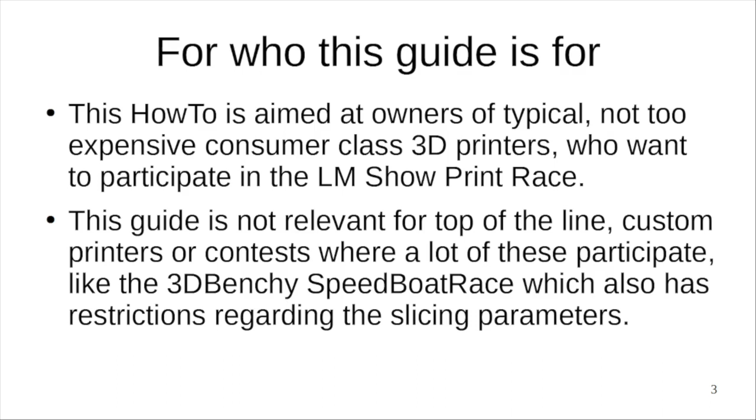Okay, who is this guide for? This guide is for everyone who wants to join the LM Show print race, which usually happens on Fridays, and you can use any printer you want. This is, however, not suited so much for people who have a really high-end custom printer like a Voron or VzBot or something like that, or for other speedboat race like print races which have other limitations.

How do you win the print race? Well, it's not about speed so much, it's mostly about cooling, flow, and the slicing, in my opinion, because you can set the layer heights as you want in this case. You can probably win with bed slingers as well, as long as no really high-end machines show up. And the reason for that is that you're printing close to the flow rate limit most of the time. I will show that in the slides later. Slicing is also very important because you can shave off so much material there that you're going to have an advantage from that. This is also a point we're going to look at.

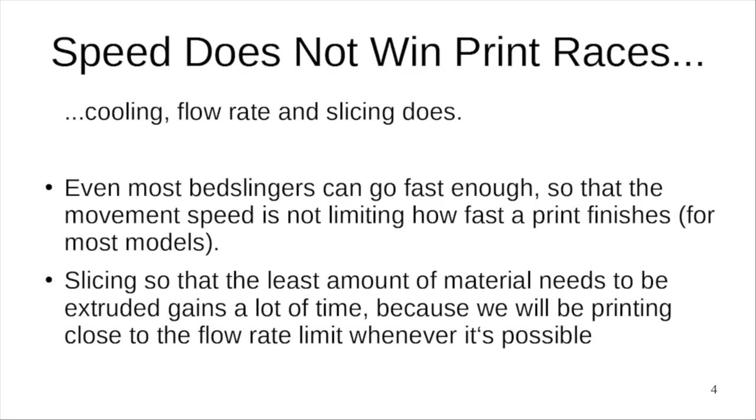Okay, let's start with the most important hardware upgrade for your printer if you want to participate in a print race and you don't already have proper cooling on it. This is a really low-hanging fruit. You can improve the layer times, which gains a lot of time when printing fast, and also you get a much nicer print quality on overhangs even if you don't print fast.

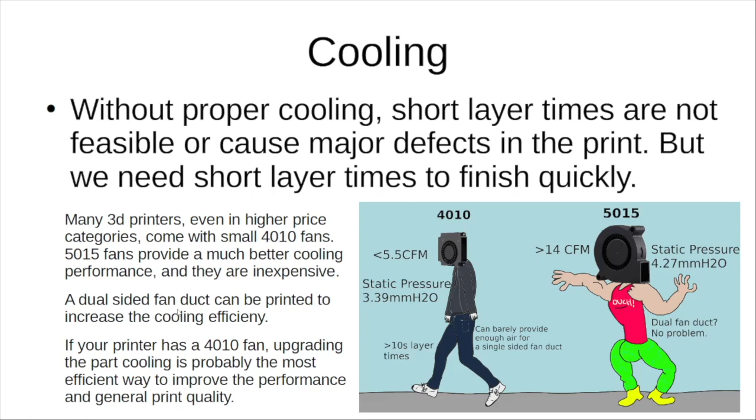So if you do a single upgrade, then it would be to replace the 4010 fans which come on many 3D printers, even not so cheap ones, and put 5015 fans on it and print a proper dual-sided fan duct, and then you should be fine as far as the cooling side of the equation.

And another really important part, of course, is the flow rate, because usually if you have a properly set up printer and slicer profile, then at the print races you will go close to the maximum flow rate of your hotend and not to the maximum movement speed of your printer. So increasing the flow rate instantly means to print faster.

The flow rate is how much material you can extrude in a given time, and to extrude it, of course, you have to melt it first, and there are several things you could do to extrude more. You can bump up the hotend temperature. This has drawbacks, however. You have to consider that you have to cool down the hotter filament again. You could increase the extruder pressure, but then you get die swell because the filament isn't completely molten inside, and it's also not a nice effect.

These are also inexpensive if you buy the clones from AliExpress or so. And it splits up the filament, has more contact surface, and melts the filament better, and you get more flow out of it, and you don't even have to install a new hot end. Just buy the proper nozzle for your hot end, screw it in, and there is your higher flow.

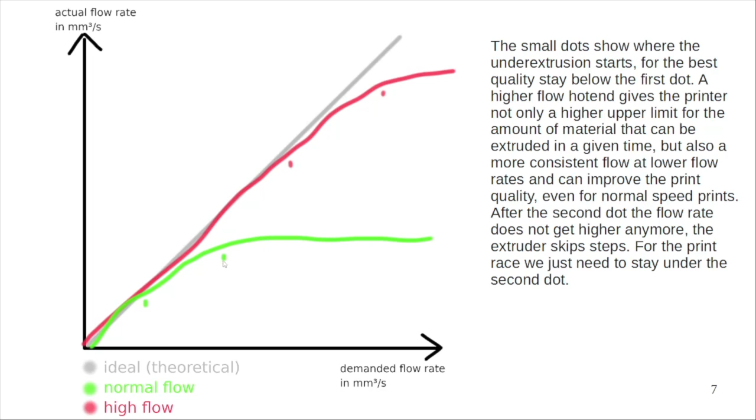But if you really want perfect prints, you do not want to operate in this area where you're under the gray line with your actual extrusion. This is where higher flow hot ends have advantages even for not so high speeds, because they are just more linear in this range here, even if you don't print so fast. So it's not just an upgrade for the print race, it's a general upgrade for print quality, in my opinion. And yeah, maybe get one of these and see how.

If you want even more flow than with the upgrade of the nozzle itself, then you can also increase the size of the nozzle, like a Volcano nozzle. These are also available as CHT nozzles, so you get both. You get the longer melt zone and the splitting of the filament. And if you want even more flow, then you probably have to reprint the tool head and install something like a high flow or an ultra high flow hot end.

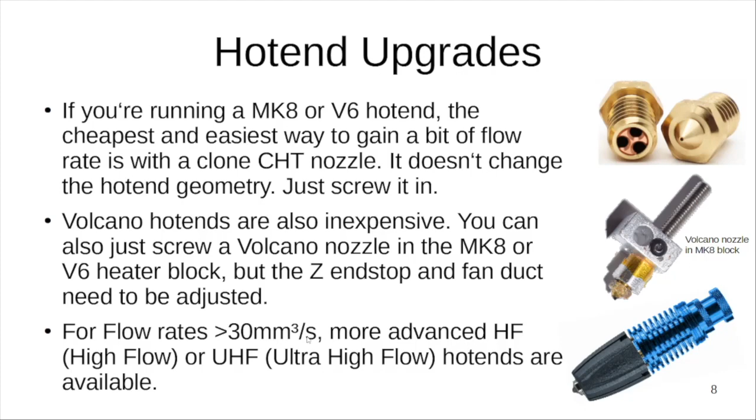Of course, the order in the complexity to do the upgrade is this. The nozzle just screws in. Here you have to adjust the end stop and the fan duct, and here you have to reprint the whole tool head. And also the price, I mean, if you look at this, then yeah, these are really cheap. The Amazon ones are a bit more expensive than if you buy them directly from AliExpress, but still affordable.

And you can go all the way here to LM's new sponsor and get this beautiful hot end here for a bit higher price, and then you will practically be guaranteed to win every print race, because no one can match your 116 cubic millimeters per second flow rate. Just for comparison, the MK8 hot ends maybe have around 12 to 15 cubic millimeters per second.

Okay, so you want to buy a new nozzle or a new hot end, then the important thing to consider is which nozzle diameter do you get it with? Well, many people say 0.8 millimeter or so is better for print races. You can print so much faster with it. Yeah, you can print higher walls with this, but you also have to print wider walls with it. So the perimeters that you print will take so much flow that you can't go fast enough.

And you don't want to print inside of the print. You don't want the wall strength necessarily. Just for the print races; of course, for a helmet also, it's great to have this. But for the print races, you don't necessarily want it, because it takes away the budget of flow and the budget of cooling that you have, and uses it to print inside and not to print to the top. And if you reach the top, you have finished the print and you maybe win. And if you print to the inside, you just make a more solid part.

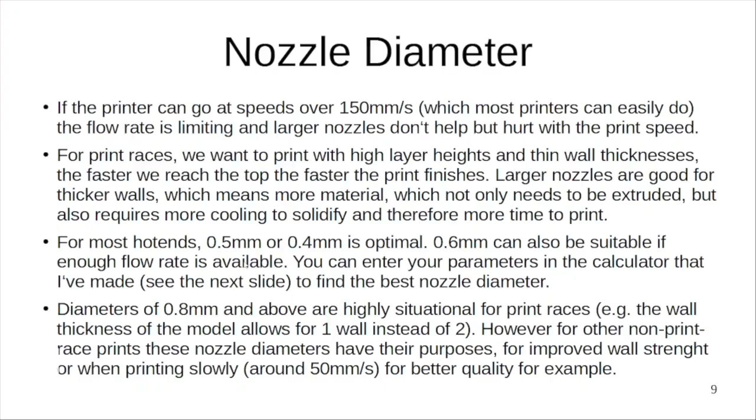So for fast print speeds, say 150 or 200 millimeters per second on average, you can't really extrude so much material that you can afford a 0.6 or even a 0.5 millimeter nozzle if you really go fast. This is something you can calculate, and I have made a small tool for you here. It's also in the presentation, but you can try it here. It's the actual link here. You enter your speed, the layer height, the line width, and the maximum flow rate of your hot end, and it will give you the optimal nozzle diameter and at which speed this will print.

So of course you could say I'm going with a bigger nozzle, but you quickly get in the range where the flow just isn't enough anymore, because this line width here is the problem. You can decrease it maybe to 80% or something of the nozzle diameter, but still you will not get these really big nozzles that are the fastest with your hot end. Even 20 or 25 cubic millimeters per second will give you not more than a 0.5 millimeter nozzle. You have to go really, really high with the flow rate to get in the ranges where you can justify a 1 millimeter or 0.8 millimeter nozzle.

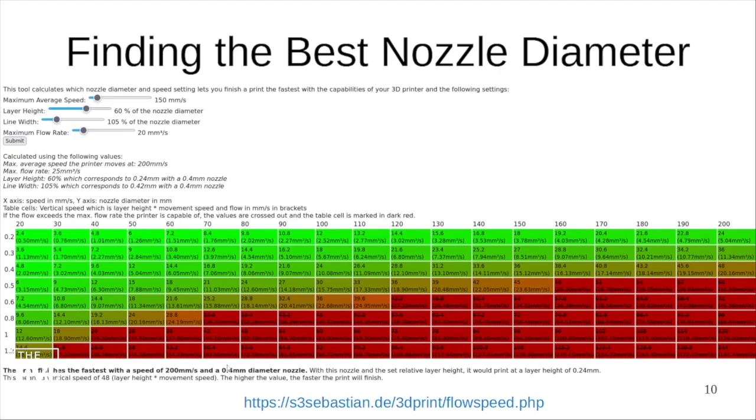But as you will see, this is about the flow rate that comes with the $1,000 hot end. So this is not something you have on your ordinary printer, even if you upgrade to a better hot end. So keep that in mind and calculate what you could use for your printer. Make sure to use the average speed here. This is not the maximum speed. You also have to consider the small parts. But even with that, you will probably not get recommended something more than a 0.5 millimeter on most printers.

Okay, we talked a lot about flow, we talked a lot about cooling, but many people probably think about the actual movement speed when it comes to print fast. Yeah, that's true. The movement speed is also very important, of course, but this is usually not where the printers are limited. Even the bed slingers are not limited in speed, they're limited in acceleration, because the print bed is heavy to move, and heavy to move means you have a big M in this equation, and so you require a lot of force to move it back and forth.

And it's the same as with a car. For example, every car can go 100 kilometers per hour. It's just the question if it accelerates in 3 seconds or in 10 up to this speed. And to print faster, you have to increase the acceleration.

Another limiting factor here is the ringing that you get, and this is actually something you can counter with input shaping, or also called resonance compensation, that comes with Klipper or even your Marlin versions. The Klipper implementation is much better, but you can also use the new Marlin version of it. This will reduce the resonances introduced by the belts, which stretch and give you this ringing on the print, which is not very nice and also can ruin your print.

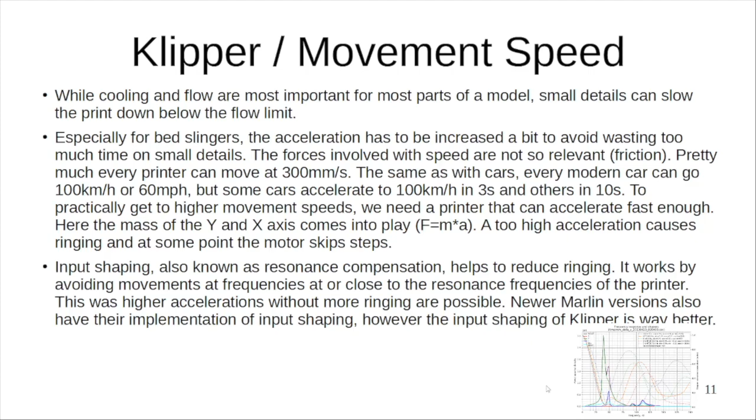So if you want to go fast, even with a bed slinger, you have to consider Klipper or another type of input shaper, and this can be achieved by multiple ways. For example, you can use an old laptop or something that you already have. Any PC is fine, and combine it with a USB type accelerometer. You can get a Raspberry Pi, Banana Pi, or Orange Pi and combine it with a breakout board accelerometer like this, which is a bit cheaper than the one with USB. Or you can get the all-inclusive solution like the Creality Sonic Pad here, which also comes with the accelerometer already.

It doesn't really matter. These are all fast enough to handle your print speeds. These are not limiting you in computing performance. So just get what you are comfortable with, and then you can, even with a bed slinger, print up to 5,000 millimeters per second squared, which is better than what you can print out of the box with it, and probably enough to compete with faster printers that have a better motion system. Of course, you can't really compete with a top-of-the-line printer, but it's already a big improvement if you go for Klipper and input shaping.

Calibration. This is another step that I entered here. Before you start to tune your printer on the hardware side, make sure it prints well at normal speed. So don't try to improve before you have your printer dialed in at normal speeds. Just something that I also wanted to mention.

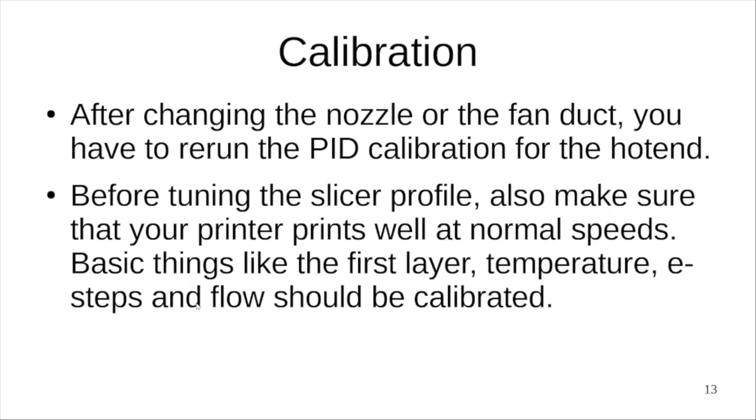The material is also important. You can't really use silk PLA or matte PLA or TPU because these just can't be printed so quickly. The silk and matte PLA just don't have the layer adhesion, and they don't stick so well if you print them fast. So you will not have a print that works well. There's an exception for PolyTerra, which is matte, but also prints kind of fast. Most standard PLAs are fine.

There are some really fast printing PLAs. You can get some small gains from them, like the Sunlu Meta PLA is not so expensive. You can try it. It's a small improvement, but it doesn't really replace a high flow hotend, so don't think you can just get away with high flow materials here. ABS is actually also fine, but you have to make sure that you really can print this without having a print that warps away and fails. This will also not be that great. So only use ABS if you have the proper print bed, but the really high-speed prints are always done with ABS and not with PLA.

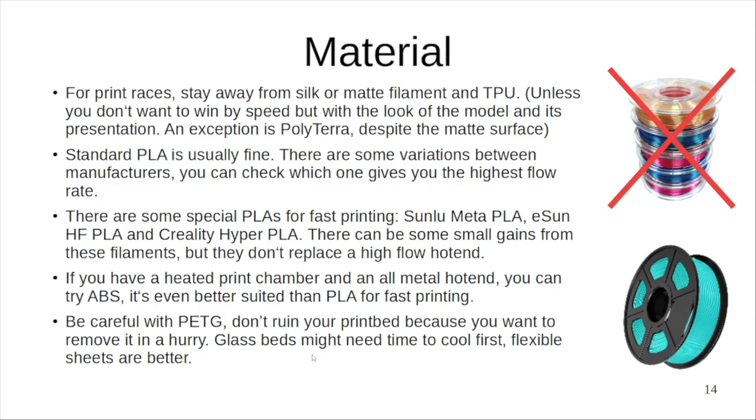If you look at the Benchy speedboat race and so on. PETG would also work, but you have to be careful if you have to remove it quickly. Maybe your bed needs to cool down first, and PETG easily damages some kinds of bed. So don't rush your PETG removal. Maybe stick with PLA then.

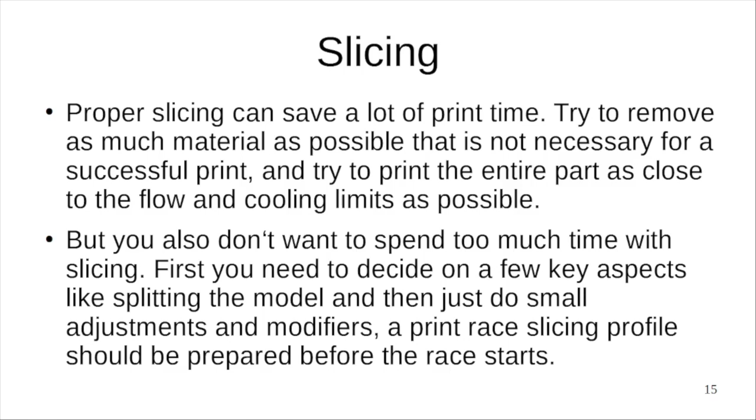Slicing. This is the most important part probably, because you can save the most time by just reducing the amount of material that you actually print. So get familiar with your slicer and prepare a good slicing profile, and then when the print race starts, you have to pull all the parts into the slicer and make the decisions, which are first, how do you want to split the model?

So look at the part really well, and then decide, do you want to split it? If the model has several parts and you have several printers, always split it. If you have only one printer, it's not an option, but if you have multiple printers, you can also consider splitting a single part into multiple parts if you can gain time there, for example, by avoiding support structures, or if it's just really big and you can print faster this way. Then after doing that, we are going to continue with the biggest part on the fastest printer.

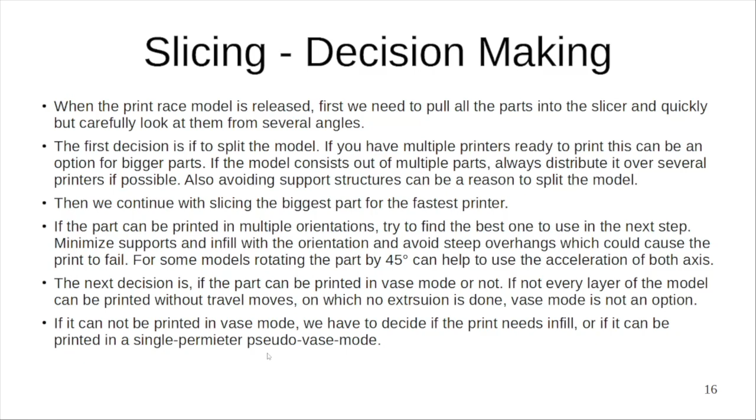Then decide on an orientation. The best orientation is one where you avoid overhangs and supports as much as you can, and generally look for printability and also speed by orienting it in a good way. The next decision after doing that is if we can actually print in vase mode or not. If vase mode is not an option, it's not an option for every print, then we are going to decide if it's a good way to print it in pseudo vase mode, how I call it. It's just turning vase mode off again, and having one perimeter, having zero infill. If it's printable like that, great. If not, we have to consider the amount of infill and perimeters.

The prepared slicer profile also has to have a few key functions. The layer height is the most important parameter, because the faster you want to go upwards, the higher the layer height should be. But a higher layer height also means you can't print overhangs so well. So you have to tune it down later with variable layer height again, maybe.

And then, of course, the speed and the acceleration are also something to set. I can't tell you the real parameters here, because you have to configure it to what you find out is suitable for your printer. Maybe for a Bedslinger, 5K accelerations and 250 millimeters per second with Klipper or something like that on a not too big Bedslinger. And for Bowden extruders, reduce the retracts as much as you can. If you can't reduce the retracts, just avoid them and burn away the strings with a lighter after the print finished.

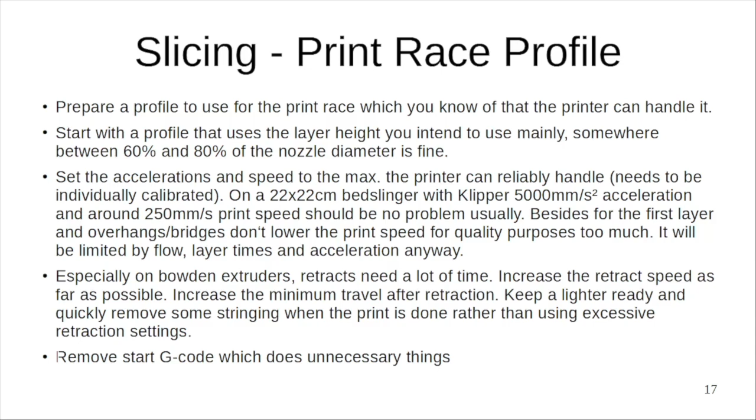The filament parameters are mainly the cooling time or the layer time and the temperature. I would recommend to go about 215 degrees with PLA. The higher you set it there, the faster you can extrude, of course, but you also have to cool it down. And cooling down is the next big thing. It's the layer time for small parts. A lot of time can be lost here.

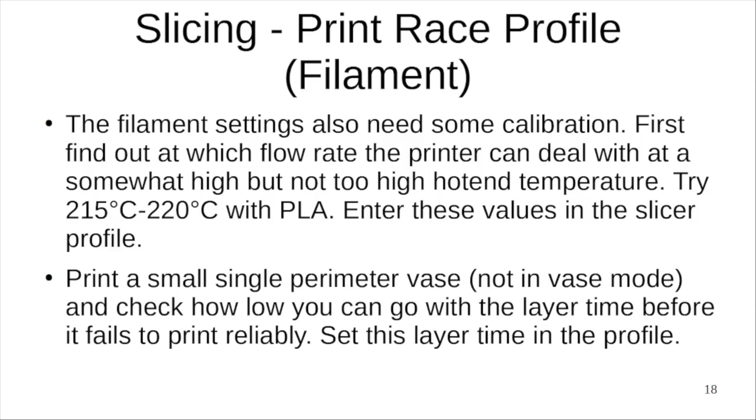You have to consider that this is also a parameter where I can't tell you what is the best to use, because you have to look at the part again and maybe adjust it, or use a time for the layer cooling that you know works well with your printer fan duct and so on. So set this before the print starts to a value that you know is working. Aim for about a second or so, and not about 10 or 20 seconds. This will not work.

The print settings for the general profile are also the perimeters, which you should set to 1. If you need more, increase it later. And the extrusion width should be set to something below 110%, because it just wastes material there. Besides the top and the bottom layer, because you have to print the width there anyway, so you can also print a wide line. So for everything that is not on the bottom or on the top, don't print too wide. And top layers should be really avoided, and I'm going to show you this here.

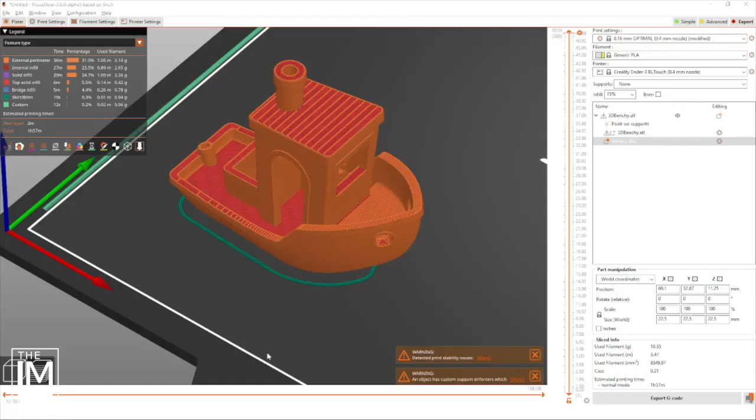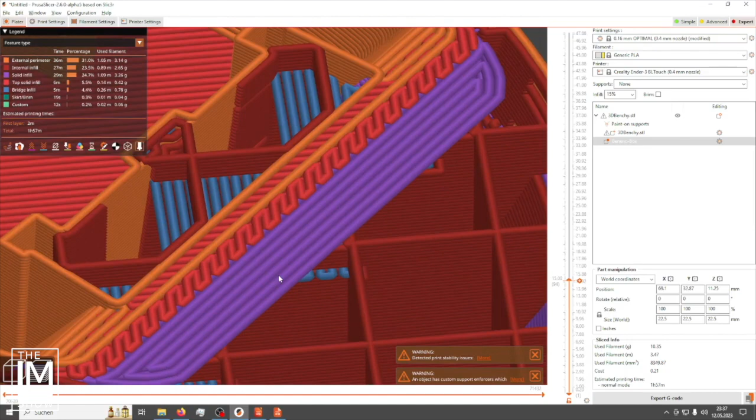Because top layers on flat surfaces are important, and you need probably more modifiers to adjust the number of top layers here. But these overhang top layers with the zigzag here and these extra perimeters that are generated, these are the worst, and they steal so much of your print time that you have to avoid these, and that is why you need to turn down the top layers. And if you need more top layers for a flat surface, add them with a modifier later. I'm going to talk about that next.

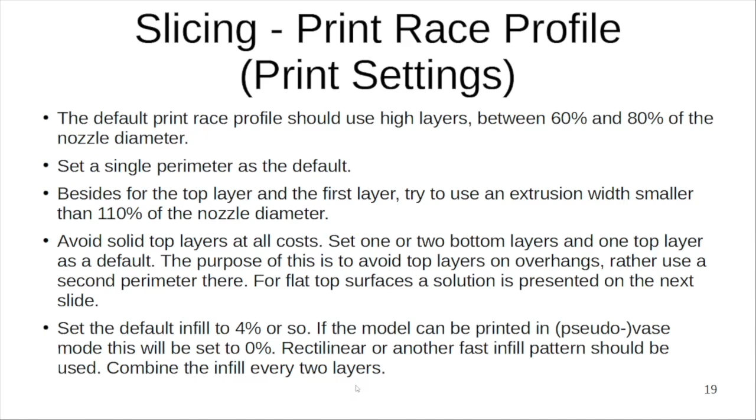And the infill should be at its lowest possible. If you need more infill in a part, then also add a modifier. Yeah, modifiers, I just talked about it.

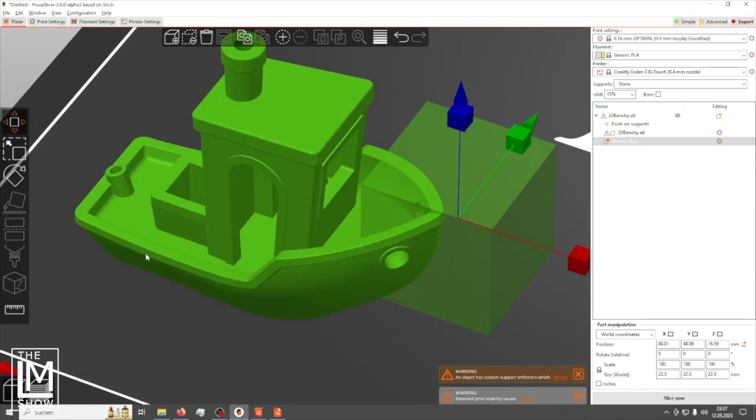These modifier boxes that you can add, you should really use them to increase the strength of the part where you need it, and you can print the rest of the part faster. And another thing, of course, is the variable layer height. You can improve the overhangs here, because not everything can be printed with high overhangs and high layer heights.

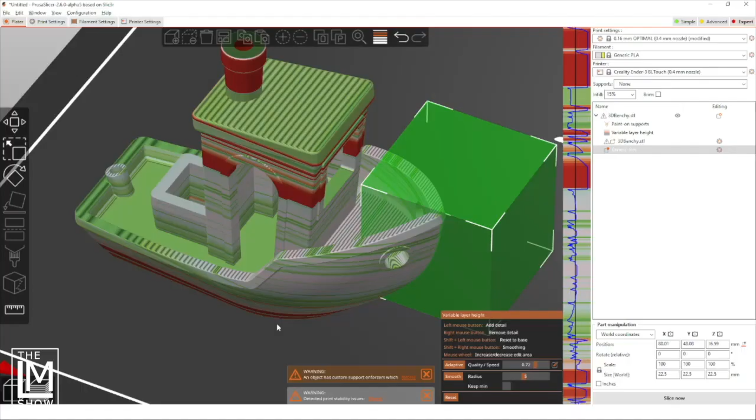Yeah, and the support structures are also important. If you would need support structures somewhere, of course you don't need it for the Benchy, then you should go and use the paint-on supports here, and don't just enable supports for everything. It will generate giant support structures, which just take so much time to print, and it's something you don't want to do.

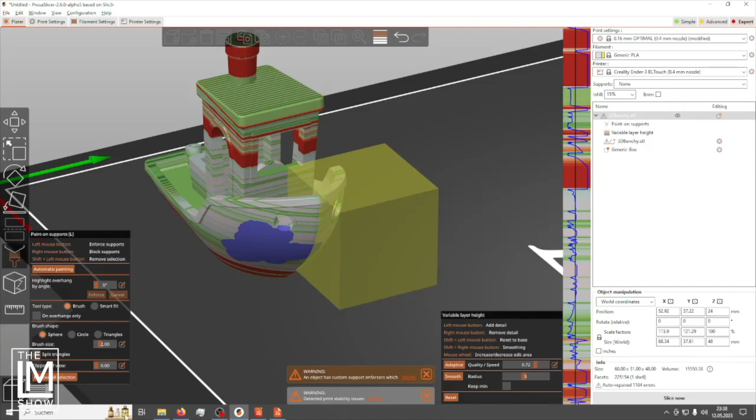And now you have finished the slicing maybe, and you want to print, but stop. First we are going to look at the actual preview of the layers, because if the print fails, then there's not enough time to start again. So look at these layers here one by one, and if you see something that will not print, then go back, add a modifier, add a setting somewhere to make sure it will print on the first try.

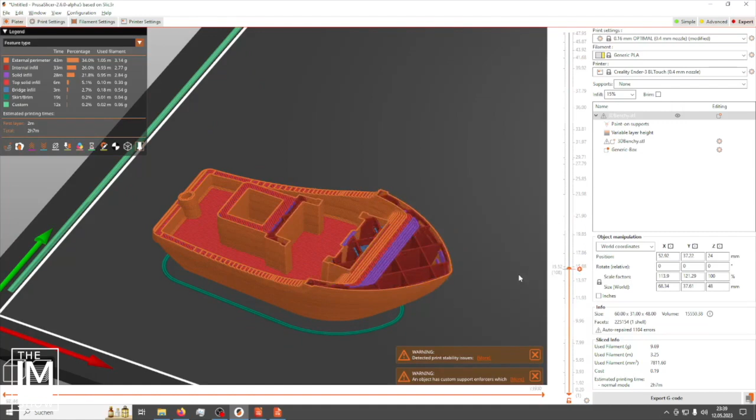And also make sure you have selected the right slicer profiles, and if you export it, then wait for the export to completely finish. Don't pull out the SD card before it's finished, and use the safe eject function for the media on your operating system, so that you make sure it's completely written.

Okay, now we are done with the slicing, and I also want to talk about the preparation quickly. Preparation means that you prepare not just a slicer profile, you also have your printer ready, in a state where you don't have to level the bed or something when the print race actually starts. I often see comments in the chat, oh, my printer is not ready, I can't participate today. So maybe think about it a few hours before, and then this will not be a problem for you.

And of course, the slicer can also be opened before the print race starts, you can load the filament before the print race starts, and you can preheat the print bed before the print race starts, but don't preheat the hot end to the full printing temperature and let the heat creep up. That's not a good thing. It could clog your hot end, and isn't worth the time saved here.

And then when it goes to the end of your print, make sure you have a camera ready. Don't search for your phone after the print finished to take a photo of it. And also think about where you're going to place the model, because as you know, build plate photos are not allowed. So make a nice place to put the model in, and have your camera ready. This is also something to save you a few seconds.

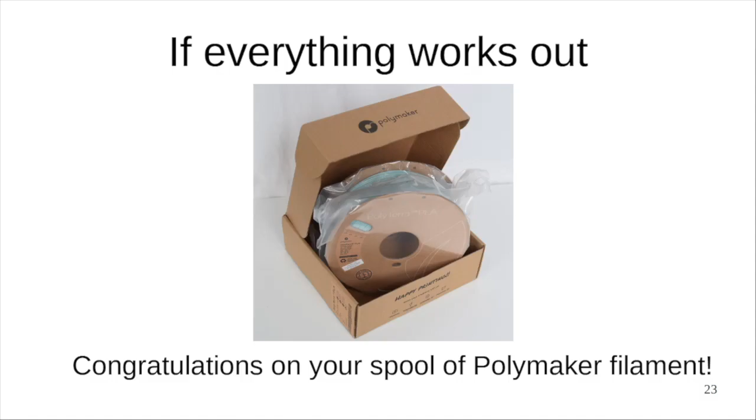And in the next step, I'm going to show you the actual slicer settings and how to slice a few models. That had a lot of awesome information in it, didn't it? Okay, the next segment that Sebastian goes into is how to create a slicing profile. And then after that, he'll go through a sample slice. Let's continue. Okay, let's take a look at the slicer.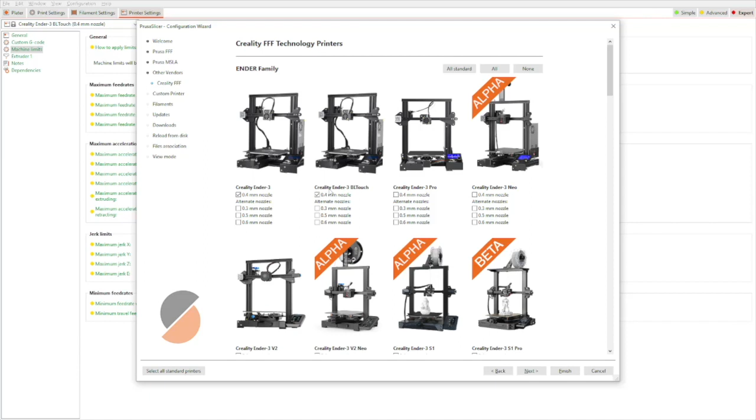I'm going to use a standard pre-configured Ender 3 profile for the standard Ender 3, in this case with the BLTouch. I'm going to use PrusaSlicer just because I'm more familiar with SuperSlicer and it, but you could also use any other slicer that you want, and the names of the settings are usually quite similar. So let's start with this one. I'm starting with the vanilla pre-configured profile. The feed rates are high enough, I would say.

Maybe we can increase the extruder feed rate a bit, but here we have to really do the modification. We need much more acceleration. We do this in the X and Y direction, not in the Z direction, and the extruder acceleration maybe a bit higher. But these are important as well. While retracting and while extruding, we also want to move fast. Looking at the jerk limits would now be a bit complicated. If you're running Klipper, this is the square corner velocity, and you set that in Klipper anyway.

Okay, this is just the maximum the slicer would allow. We have to set the actual speeds in the print settings later. And here for the extruder, also some important settings. If we are using variable layer height, this will be the smallest and the biggest layer height it will set here. So we increase it a bit, maybe 0.12 and maybe 0.34. Retractions, this is a Bowden setup. Let's just pretend we have a direct extruder put on the Ender, so it gets a bit faster.

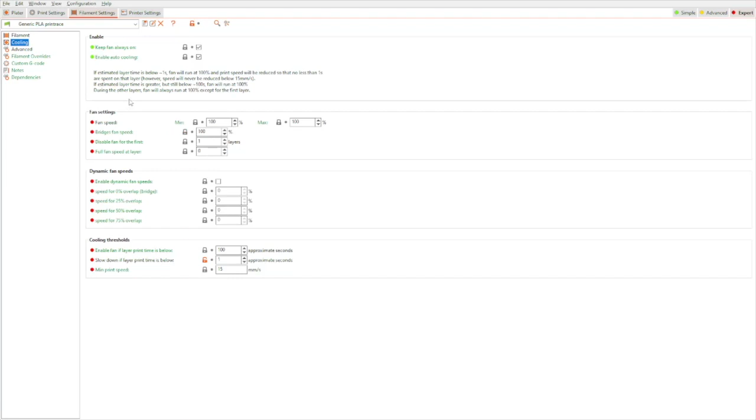Okay, so we should be fine with the filament settings. Maybe we can also just save it here right away. Print race. You should make separate profiles, of course, for your ordinary printing and the print race, because you don't want to use 1 second layer time for nice prints.

Okay, so the print settings, which have most of the general slicing parameters for the model. I'm going to go with 0.24 millimeters here as default. I have my printers calibrated for the first layer for 0.28, usually easier to do than the 0.2. And now we have to reduce the material that we are extruding, so perimeters 1. Don't set the spiral vase mode here. You can activate it if you need it. Top layers, also just 1. If you need more, we're using modifiers and not default settings, because these can take up so much time.

Bottom layers, you could justify 1 or 2. I say we're going with 2, because if we select just 1 and the print doesn't have a good base, that could cause it to fail. So we are going to be on the safe side with 2 here. It's not much, of course. It's not great for a functional model, but we want to print fast. These are not things we want to change in this case. And seam position nearest is best.

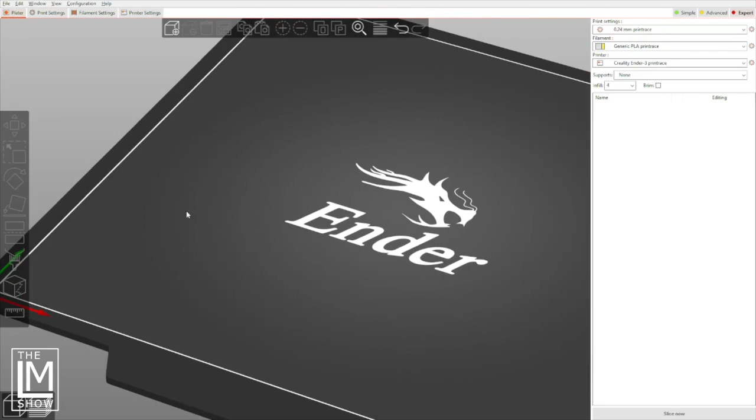Okay, then let's also save this. Let's call it print race. So okay, now we have a slicer profile and we need to add some models. Okay, now I have a model from a previous print race here. I will just pretend the print race just started and we just pulled it in.

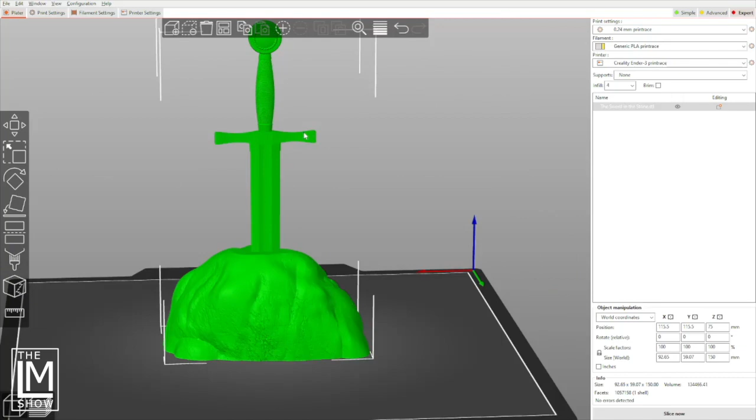The first thing is we are going to look at it, and yeah, one thing we notice is that this would need supports. We don't want to print supports, so this is something I would cut. It's only one part, but it needs to go on several printers anyway. So let's go to the bottom of the sword here and cut it just above the rock. So fine, we're keeping both parts, of course. We need to print the sword as well.

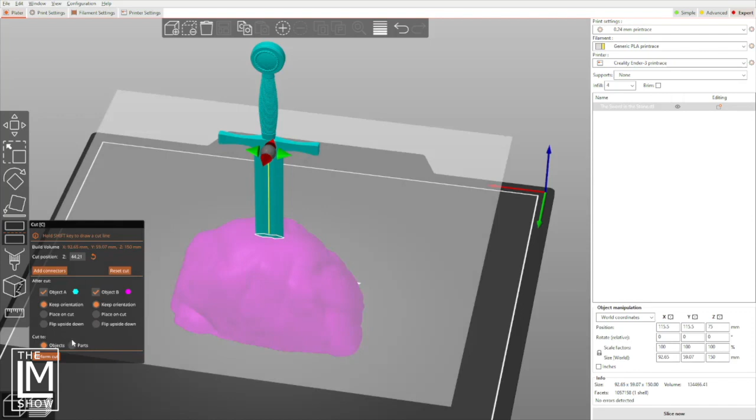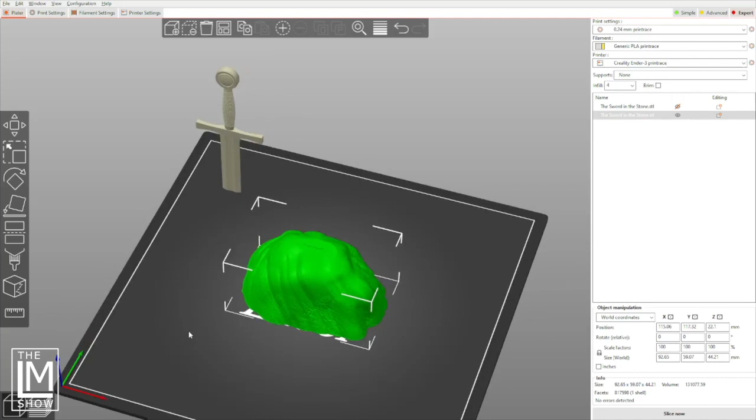Okay. So don't delete anything here, just hide it, and if you hide it, it won't slice. It will just slice the rock now when you hide it here. Now to the rock. Next thing to consider: is this a vase mode print? I would probably say no, because we can't print the top layer here very well in vase mode, so it's not a vase mode print.

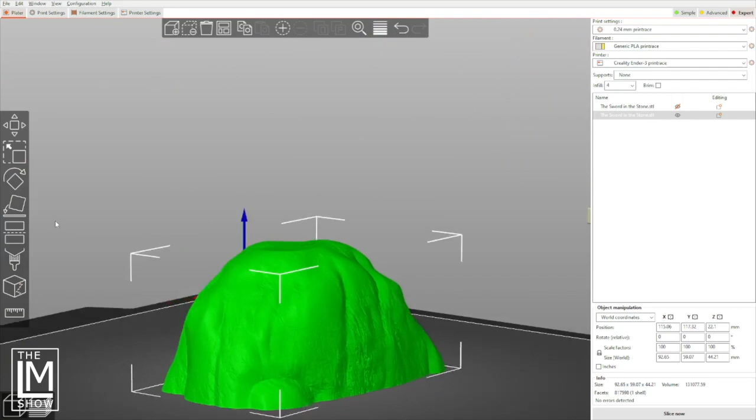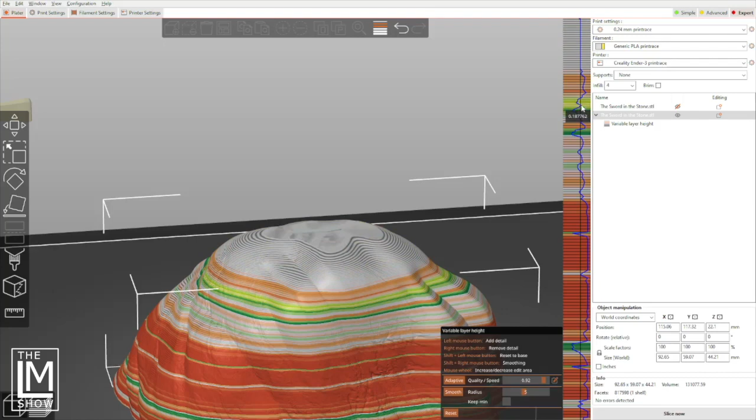Then the next thing we are going to do is to check if we want to use variable layer height, and yes, it is a good print for variable layer height, so let's do the adaptive layer height. We don't really need so much green here. Let's make that a bit faster to default layer height, but we can print quite fast here. That's just upwards, and yeah, should print fine. Okay, then we have that. And what else to consider?

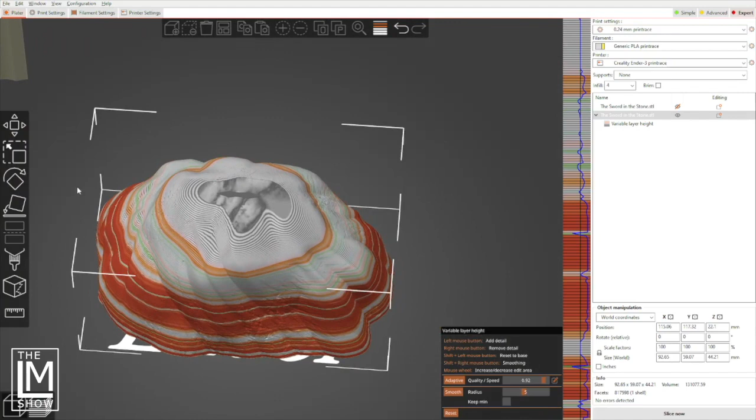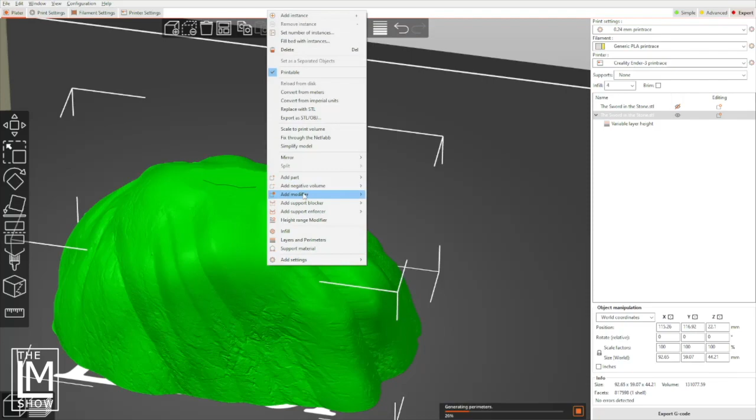I think it's something with a flat top surface. So we have to check for the modifiers now. It doesn't need supports, obviously, but the top surface won't print well this way. So let's go back to the normal view here and add a modifier, a box. Okay, so too small box, and make it a bigger box.

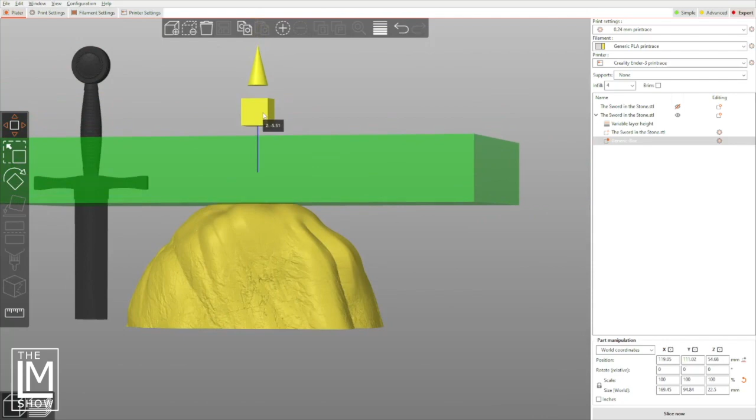So now we have the box, and we want to use the box to increase the number of top layers here, because we don't want the top layers all the way around on the overhangs here. We want it on the top only, where we had a hole if we didn't add it. Generic box, and for the box we can now add modifiers like layers and perimeters, and here we have the solid top layers. Okay, start slicing, and let's see how it turns out.

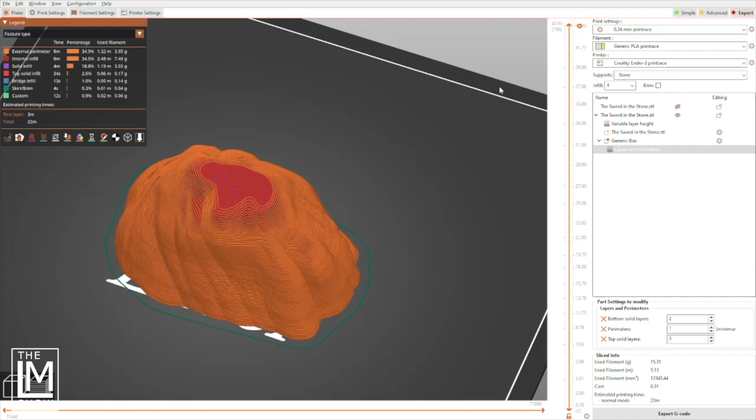Of course, we don't need supports here or anything else. And now we have the first slice. First layers look okay, then we can print up without a problem, and the top also looks fine. Yeah, the amount of infill. Do we actually spend a lot of time on infill? Yes, we do. How can we improve that? Maybe we are going to add another modifier and just do infill in the middle.

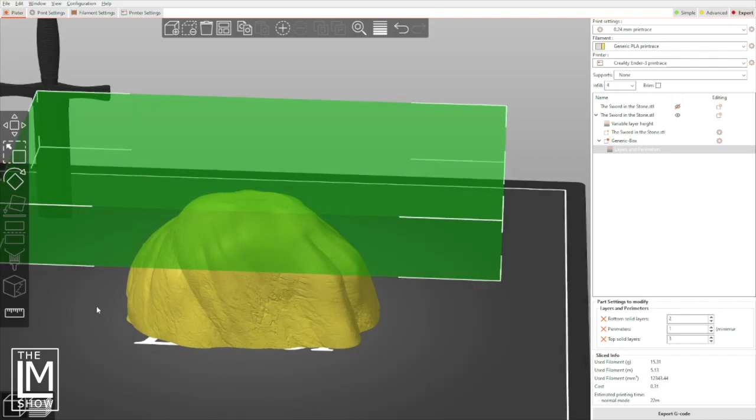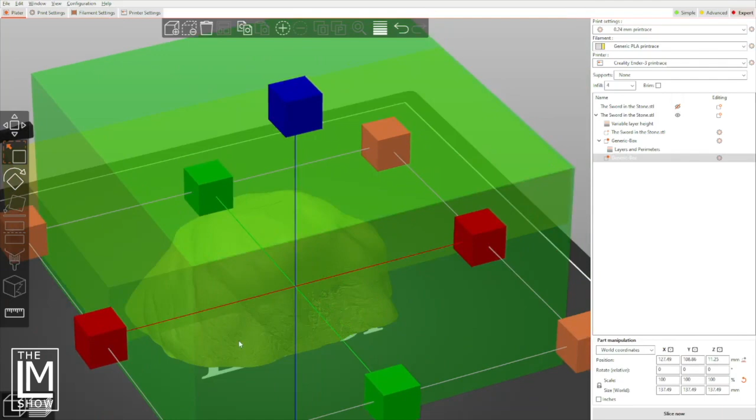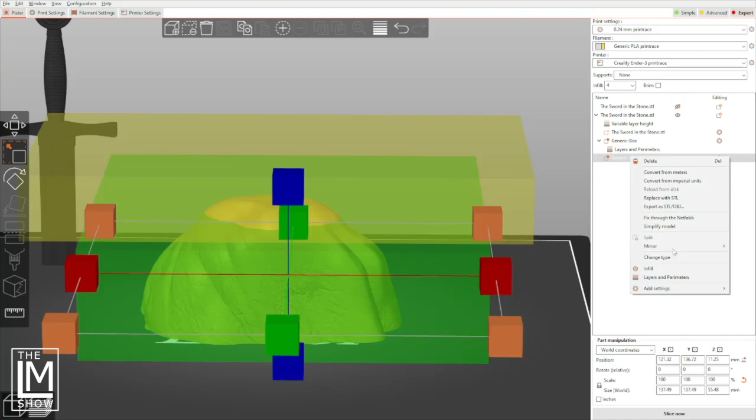Remember, we are saving 8 minutes of infill here, so give it a bit of time to slice it here. Add another box. We want a modifier, not a part. Here, box. Make the box bigger. Move it around. And we need a bit of infill below the top layer. It needs to bridge here around and then stabilize, and this should be fine by the time it arrives at the top. So okay, generic box, and here we're going to modify the infill and set it to 0.

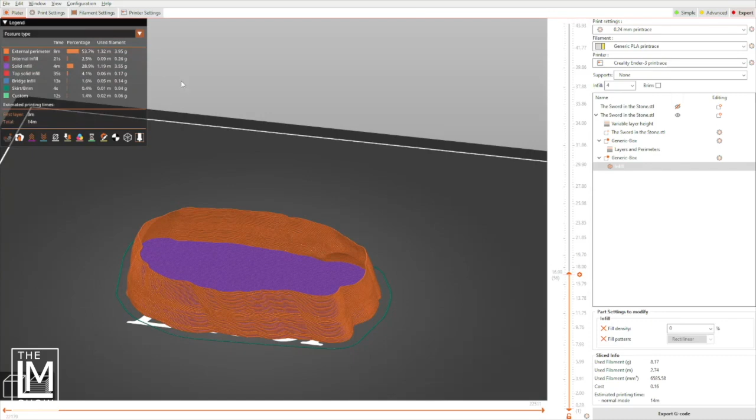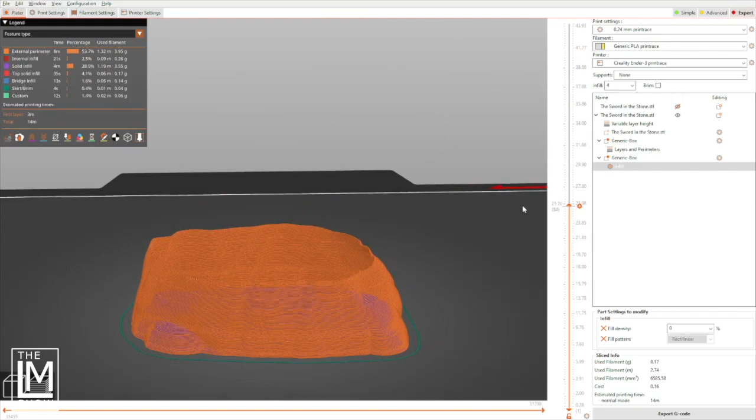Oh, and we're down to 14 minutes, and from 8 minutes of infill we are down to 21 seconds of infill. That's much better. So at this point I would take a final look at it. Good enough, I would say. Yeah, bit fragile, but I printed it this way, I think, and it worked, so we can try it. And now I would double check: is the right profile selected here, for the printer I want to print it on, not for the other one? And yes, it is. And at this point I would just export the G-code.

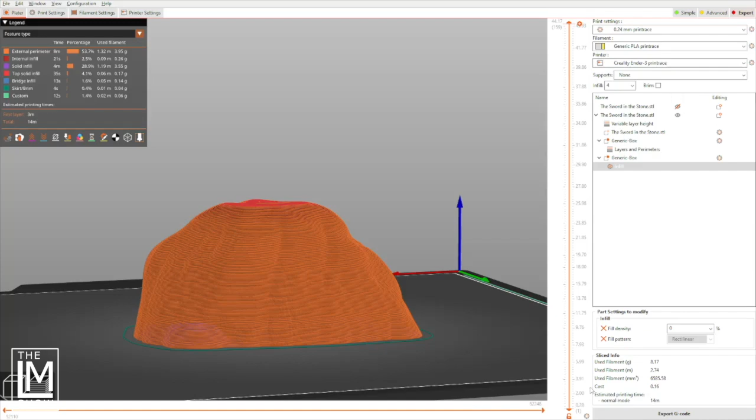Or if you're running OctoPrint or if you're running Klipper, you would send it to the printer now, and from this moment on, if the bed is preheated, maybe 1 minute to preheat the hot end, and then 15 minutes later this is done. So we have 15 minutes now. I just sent it in virtually. So I have 15 minutes for the sword here.

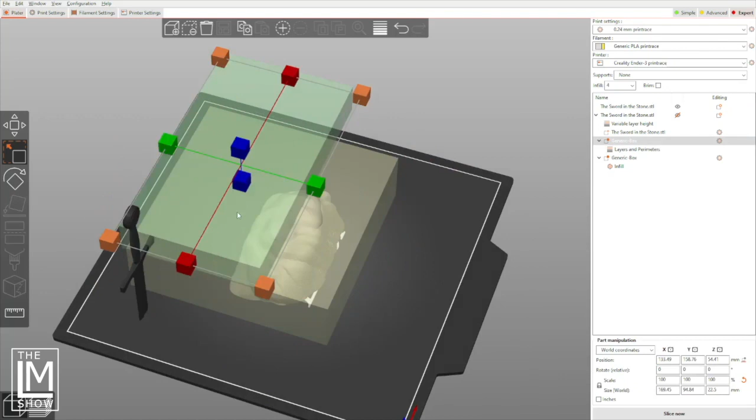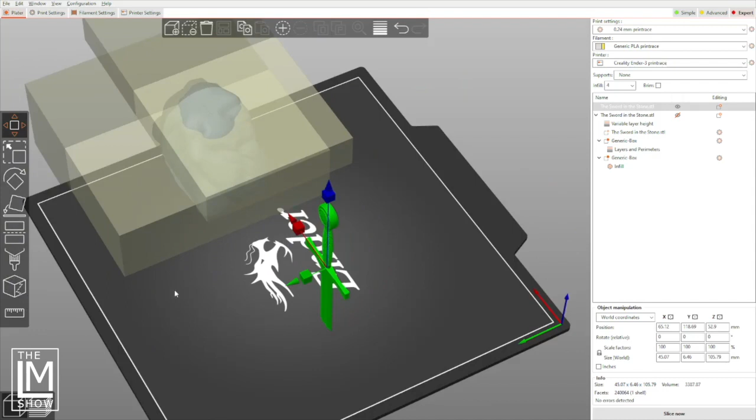Okay, just going to move this away. No, not the box. I want to move the whole thing away. Here. If it lets me. Yep. Yeah. So good enough. Do we want to print it this way? No, we don't, because it requires supports. We are going to lay it flat. Place it on flat surface. No, this is not so good. Rotating it manually then. Okay, is this printable? I guess so. Good enough.

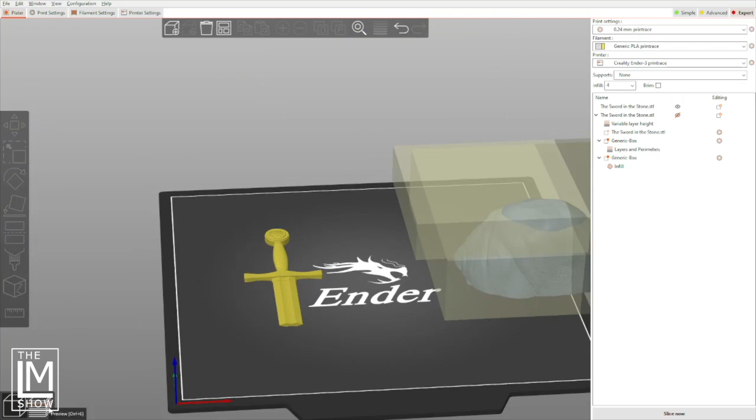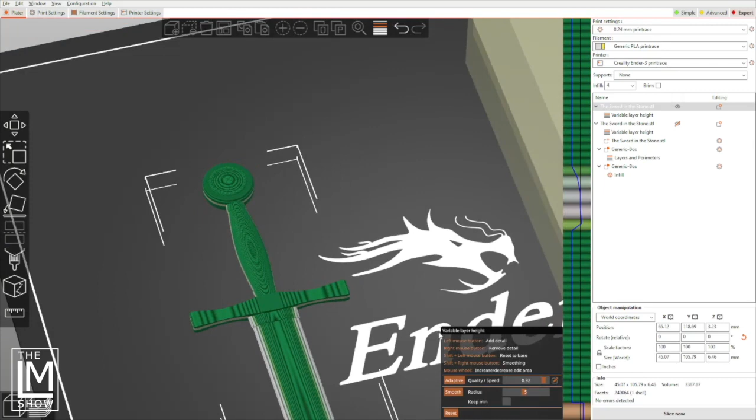Now we have to consider, no, we do not split it. Yes, we do want variable layer height here, because it would look very rough on the top. Adaptive, oh, this is actually very thin with the layers here. How long would it take? 8 minutes. Okay, it's fine.

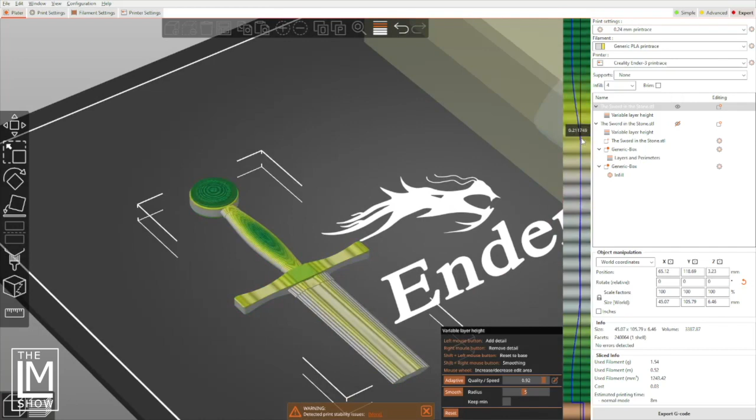If we have a printer that is also that fast and can print in 8 minutes, we can say we print a higher quality sword, maybe do a few thicker layers in the middle, but leave the top layers like this. So okay. Then just make sure again. I don't think anything can fail here. It's really a flat object, so not much to fail here.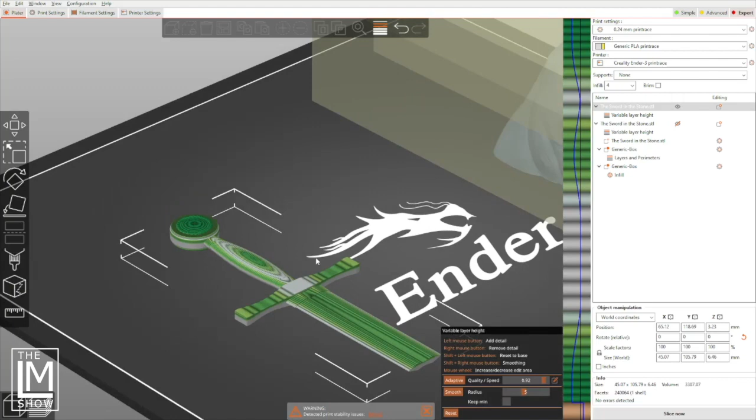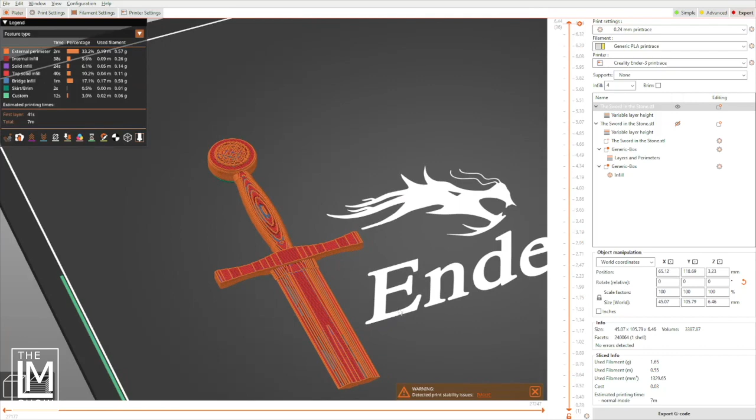So we could slice it. Check it if it needs a brim. Doesn't have enough support here. There's no first layer here. Okay. No, brim is not good. Maybe I paint on a support here. Just a bit. Should be good enough here.

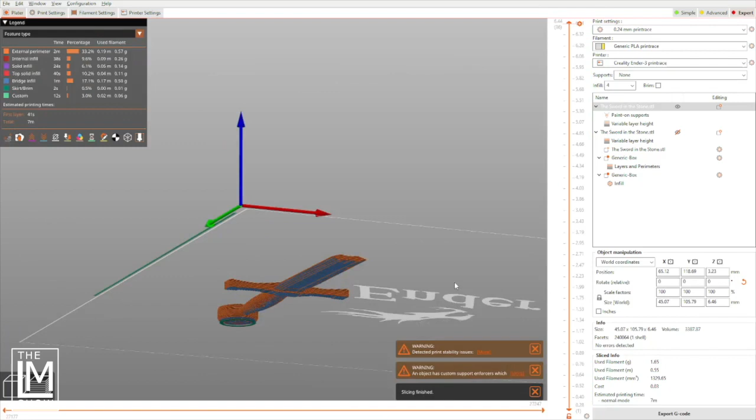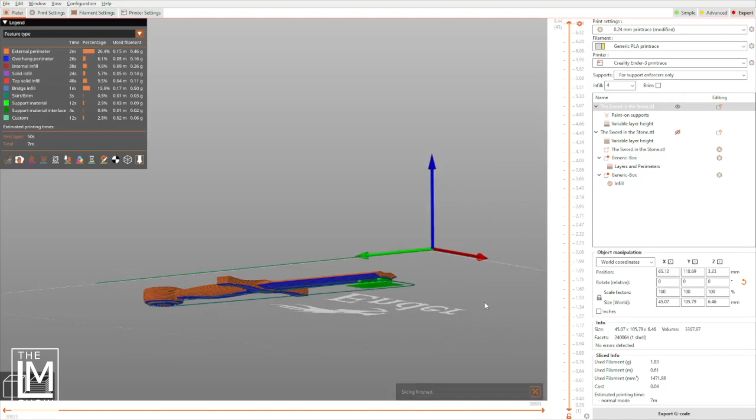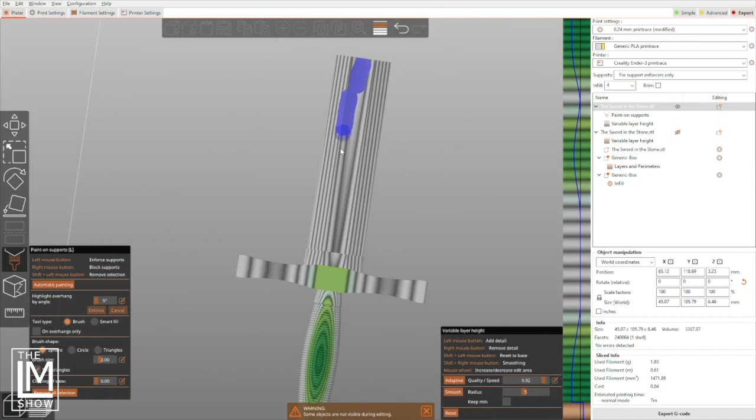Yeah, we need to enable them. Yeah, this would print fine, I guess. Prints up here and bridges over there, I guess. Yeah, why not? Can we support the whole thing? I mean, the other thing is printing now virtually, so we can check if we have time for that. 8 minutes. Okay, it should print well now.

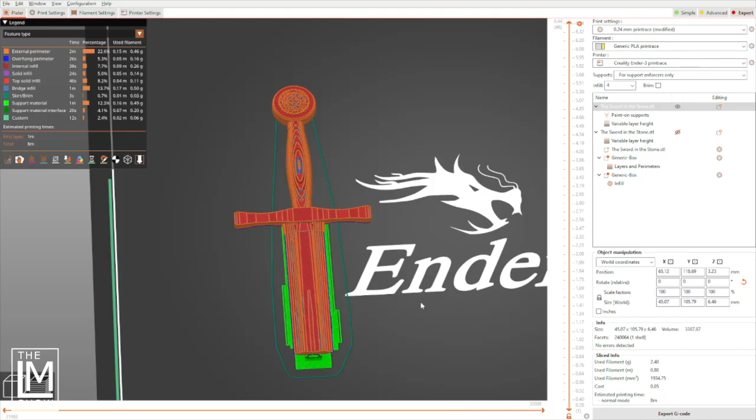Okay. Yeah. So we are having two parts here. I would just check if the profiles are the appropriate ones and send this to another printer. Or even if I just had one printer, I would print this after the one part because it's better if we lay it down flat, because we have too many short layer times printing it upright, and this would be a cooling issue. Okay, I would send this to the printer now and print it.

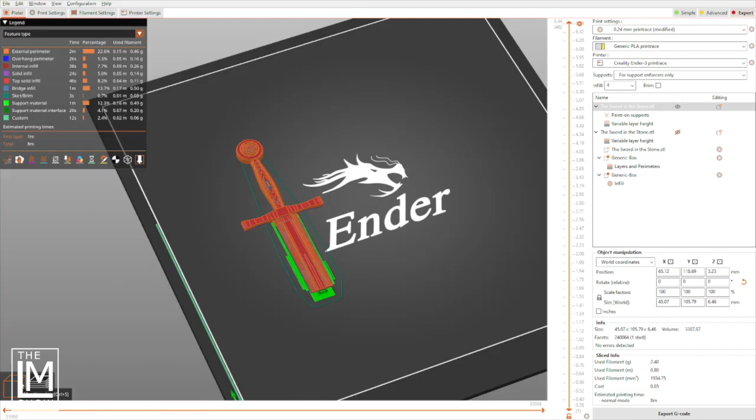And in the meantime, because we have two parts, you can either search for your glue bottle, or because I didn't have any glue yet, I took out the hot glue gun and heated it up. And this other part only, where is it? Only takes 15 minutes, so we don't have too much time now. And remember, both parts are printing, and now you can prepare the photo, and you can prepare what you need to put it together. And yeah, hopefully no one is faster than you are.

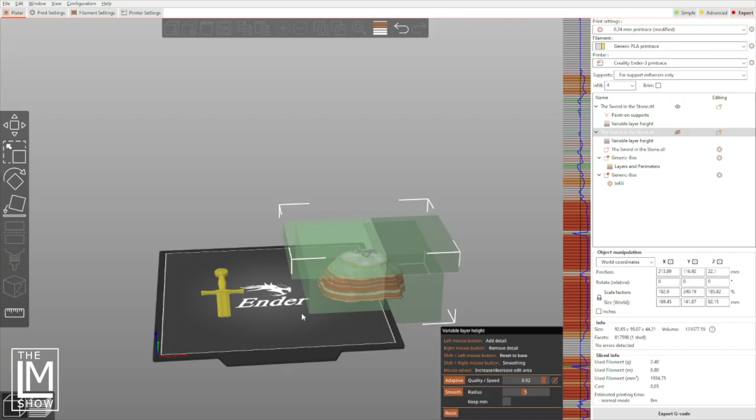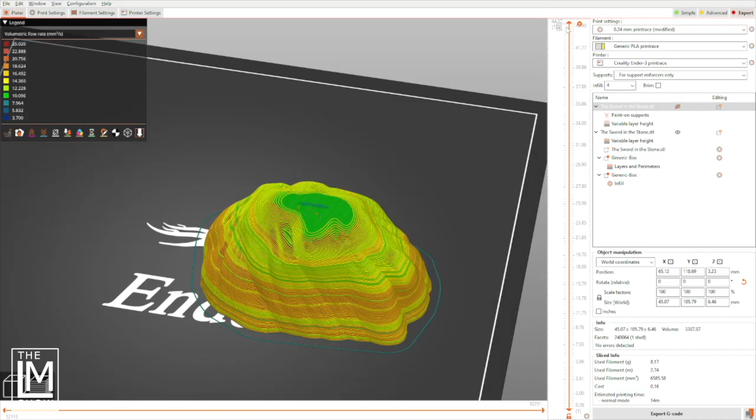Okay, maybe also something that I should show you is not just the speed, but because we talked so much about cooling and layer times, if we slice this properly, we have a decent flow rate here. And you see orange is about 20 millimeters cubed per second. And of course, we are going to slow down a bit for the thinner layers that we set in the variable layer height in terms of flow rate, but most of it is around just under 20 millimeters cubed per second, which is probably good enough for the flow rate. If it was around 10, I would think that it's not enough and we can go faster.

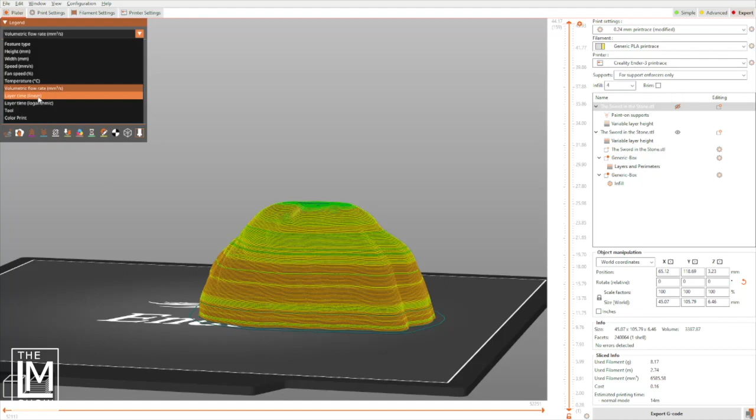But yeah, we don't need to use all of the flow rate, because we get in this region where the hotend isn't linear anymore. If you say it's the maximum 25 millimeters cubed per second hotend, and we only have one perimeter here anyway, so this is what I consider good enough here. And the layer times, we just want to make sure that this is not slowing down too much because of the cooling, and it does not. It's 2 seconds everywhere. And yeah, if it would go considerably up in layer time here, we would have to adjust cooling as well, but this is fine.

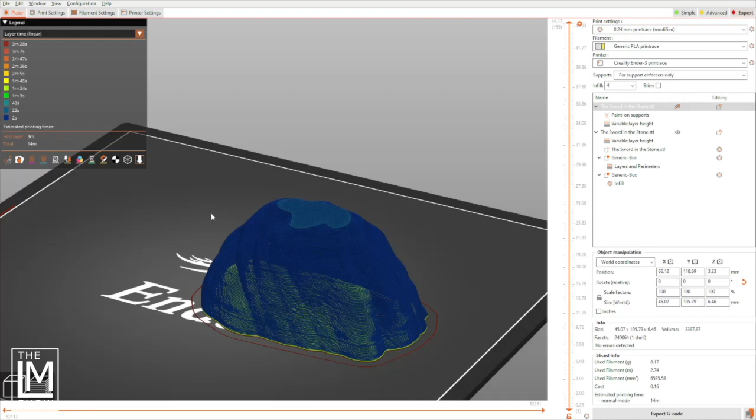Pretty awesome, wasn't that? That's like information overload when it comes to slicing and 3D printing.